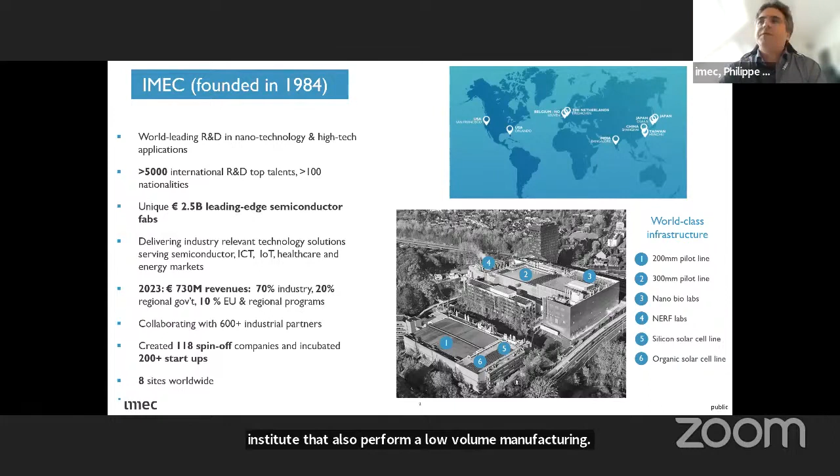Okay, so quickly about Imec. We are an R&D institute that also performs low volume manufacturing. Essentially, we cover all the TRL levels that can be possibly made with these nanotech technologies. We have been growing considerably. We are now more than 5,000. Most of our revenues are actually out of industry.

And we have two sites, one on 200 millimeter, one on 300 millimeter, and the 200 millimeter site is more dedicated for the most mature activities, including photonics and optics. But we are also expanding these activities in the 300 millimeter. So the infrastructure that we have on the 200 millimeter is based originally from a CMOS baseline 0.13. The 300 millimeter is more advanced, 65 to 28.

We are, of course, well known to other people for the most advanced CMOS scaling, but I didn't put it on this slide. We are operated 24/7, and we have all kinds of integrated photonics and flat optics type of technology together with the ability to manipulate different kinds of substrates such as glass substrates.

So when we look at our different platforms, we essentially have pixels. So this is the active part. We're doing photonics, nano optics. We're also covering MEMS, 3D, and so on. And today, I will talk to you about meta-optics, multispectral, silicon photonics, silicon nitride photonics. We do have as well some activity on nanoimprint lithography that is somehow related there, but I didn't have the time to cover that today.

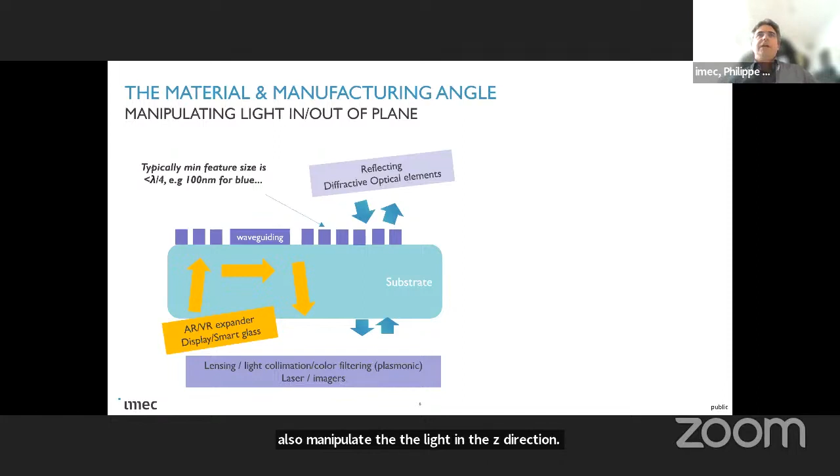And there are for us critical aspects in terms of coatings and thin films. First is the feature size. Obviously, when you want to manipulate the light towards the lowest wavelengths, then things tend to be very small, specifically for meta-optics. The refractive index, in order to have a good core, the transparency is important.

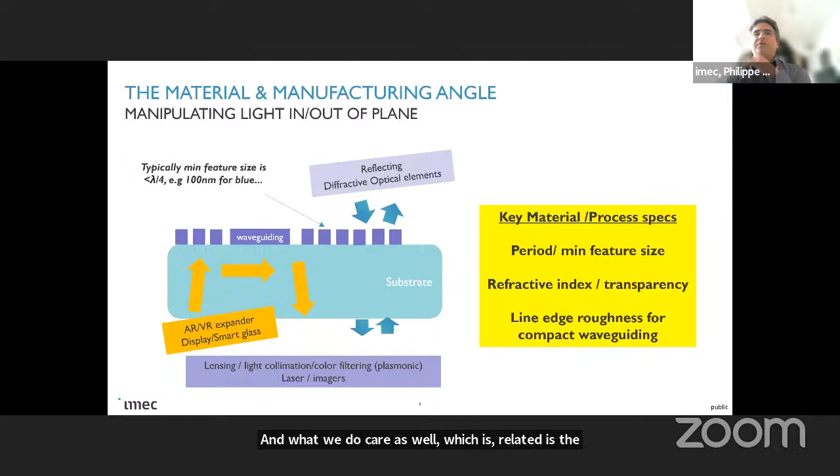So at which point do you decide that you have a waveguide or not? It's actually a perpetual debate in the organization, believe me. But essentially, that's what it's coming down to, the transparency. And what we care about as well, which is somehow related, is the line edge roughness or eventually the surface roughness of the coating that we are using.

So when we talk about integrated photonics, the most popular technology that we have is our integrated silicon photonics platform. It's based on crystalline SOI silicon. We do have as well LPCVD silicon nitride waveguides that can be integrated together with the platform.

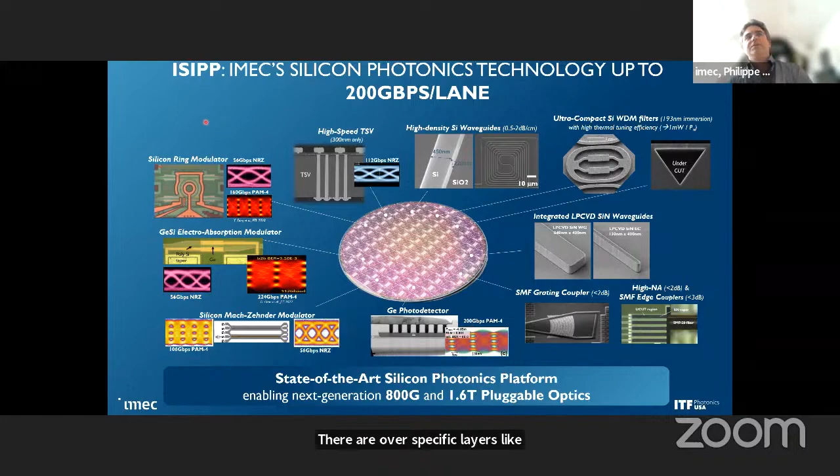The platform is very complete, actually has been developed in our facilities, and has been transferred to a production site where our PDK is running. And these are the people at the end that care the most about the control on thicknesses and on refractive index in the organization. There are other specific layers like germanium and so on that we are growing by epitaxy, which also need some careful processing.

This is this first platform where you can see we are stacking the SOI, we are putting the silicon nitride, and then we have back-end of line type of processes that we are running. We also have a low-loss silicon nitride, and that one is the high-temperature nitride, which goes into the dB per meter range usually. So for some applications, specifically in quantum, they are really chasing the photons. And we do use this platform for this kind of application where the losses are extremely important.

For meta-optics, for those who are not familiar, the light propagates in the Z direction through the surfaces, and you are able to achieve different kinds of functions. So lenses is a very classical one, so flat lenses in that case, but you can also do color filtering, you can do beam shaping, you can also use it for doing some kind of beam steering, shaping, display expander, and some people can also use it as a reflector. So the platform is very versatile.

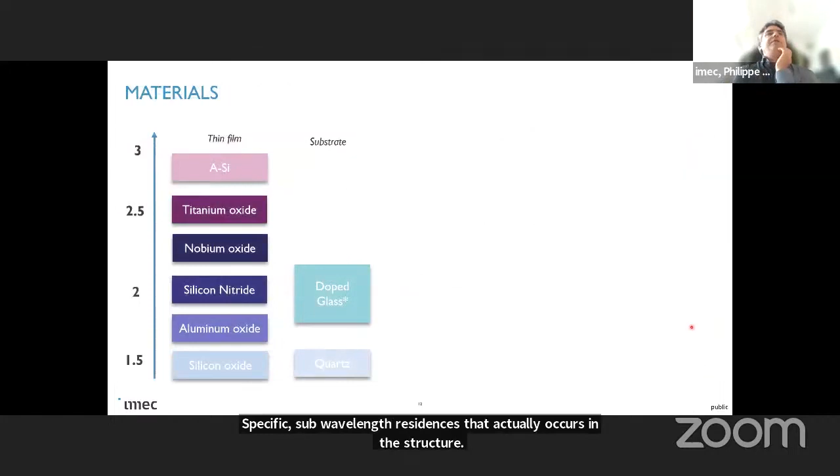And it relies on this specific sub-wavelength resonances that actually occur in the structure. We are using different kinds of materials for that, starting from the low index, silicon oxide and quartz for the substrate. And then there is a lot of work going on doped glass, when you're actually using the core of the glass also as a waveguide. So that is very popular in AR/VR.

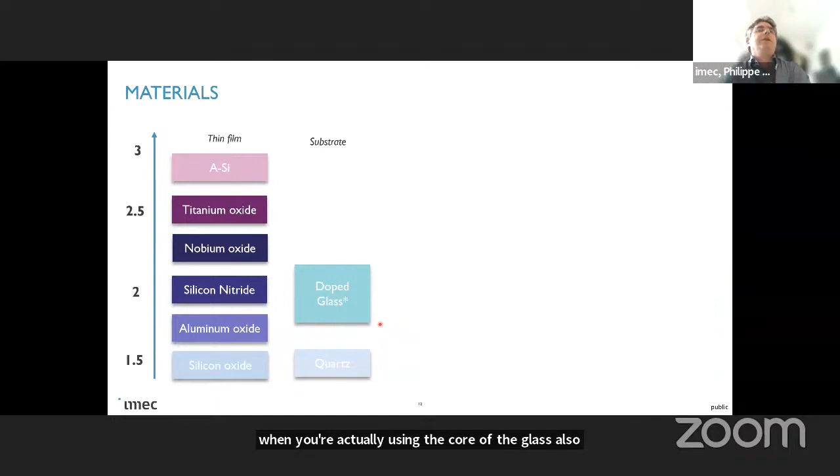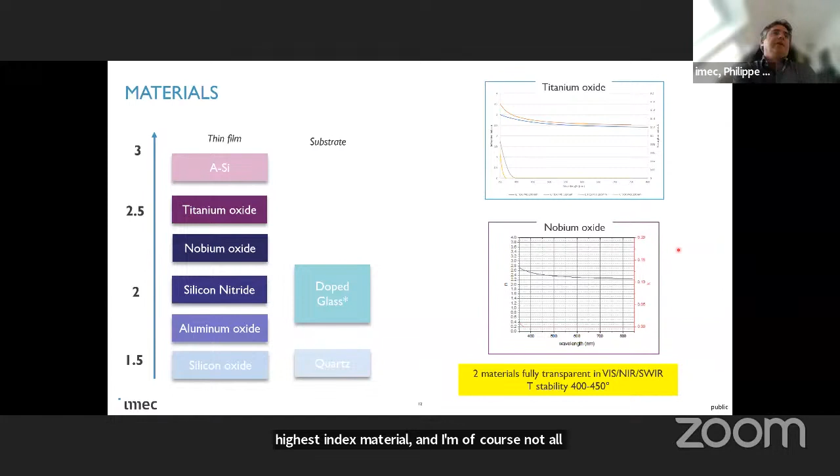But we are also looking into the highest index materials, niobium oxide, titanium oxide, and even amorphous silicon. They are, of course, not all transparent in all the wavelengths, but that is what you need to do, for instance, when you are operating in SWIR or above 900. We use the silicon because it has the highest index. Otherwise, we start to use a material like titanium oxide and niobium oxide.

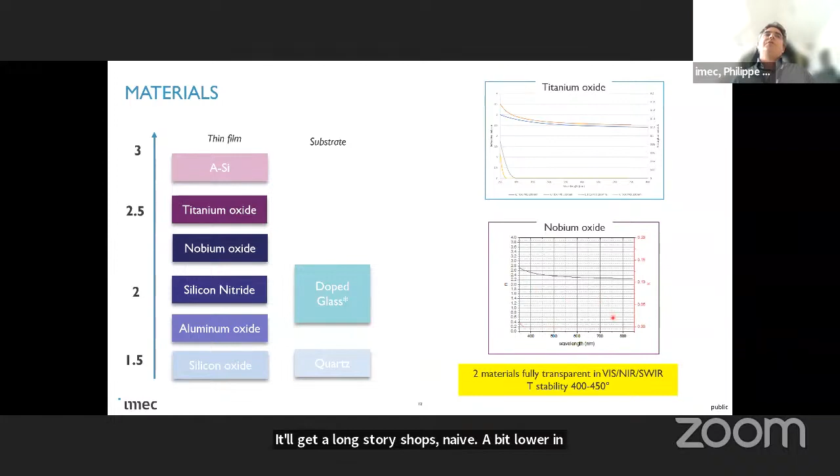They are slightly different. There is perpetually a lot of debate in Imec on why we should use one and not the other one. And to cut a long story short, niobium oxide might be a bit lower in index, but actually is much more stable when it comes to temperature. And titanium oxide can still buy you some performance if it's processed in the right manner.

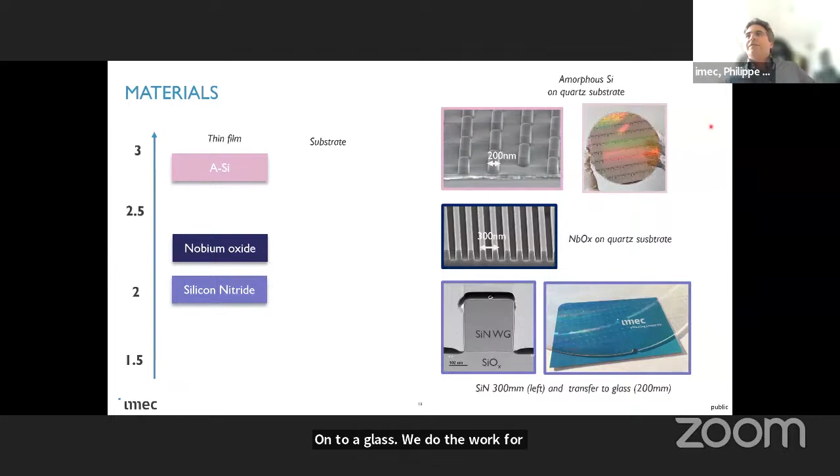We have been processing these different kinds of structures. So with the silicon nitride on glass substrates. So these are structures that are either directly processed on the glass or that are actually layer transferred onto a glass. We do the work for niobium oxide and amorphous silicon. Here you can see some examples of 200 millimeter wafers that have this flat optics type of structure.

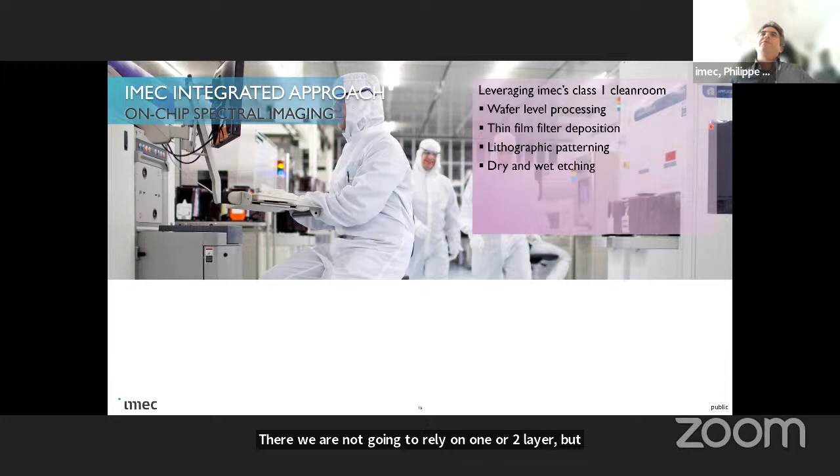Another important item today: we are post-processing imager wafers with Fabry-Pérot type of structures, so thin film interferometers. There, we are not going to rely on one or two layers, but clearly on a stack of very different layers where the uniformity, actually the optical path, is extremely important. This is something that we do in the organization.

So each of these small blocks that you see there, you can see all the layer stack, we are directly on the pixel processing a stack of thin films. The deposition is very important. We are working with Bühler actually on the topic.

I see they are later in the call. I think they'll be happy that they are cited here.

But we do as well have, depending on the wafer size, other kinds of equipment that we use. This is helping us to provide different kinds of structures. So we have line scan, we have classical imaging with Bayer-like patterns. Depending on the wavelengths that you want to sort, we apply some different kinds of processes.

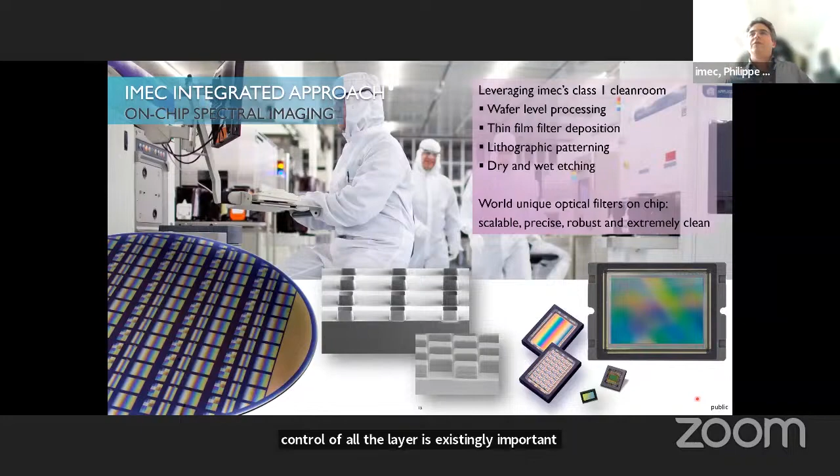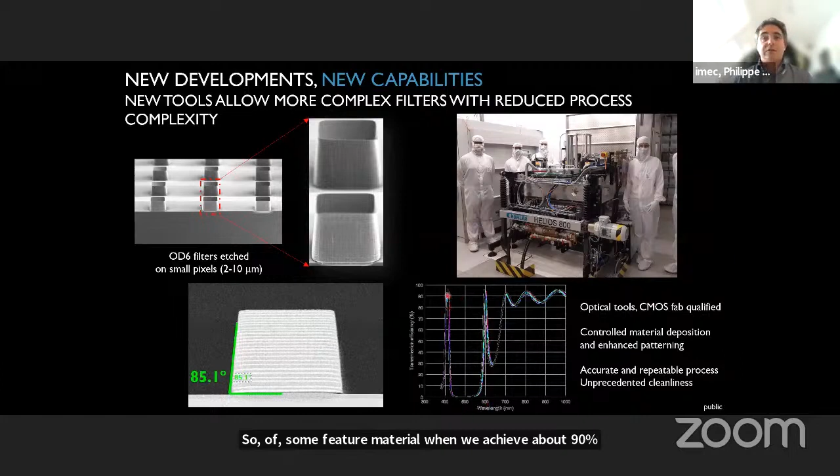And the control on all the layer thicknesses is extremely important because the direct physical thickness is going to determine the wavelengths that you're going to filter. So here, a classical example of some filter material where we achieve about 90% of transparency at 400 something nanometers. You can see this is a typical layer stack that is being used.

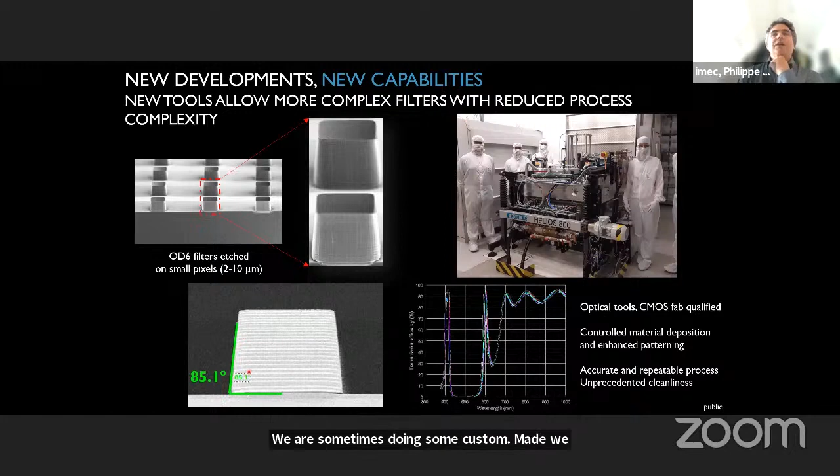So the layers are not always uniform. We are sometimes doing some custom made thicknesses. We can etch quite straight. So the etching, I know we are not in an etching meeting, but actually once you have the good layer control, etching this material is also extremely important. And so far, this is what we can achieve.

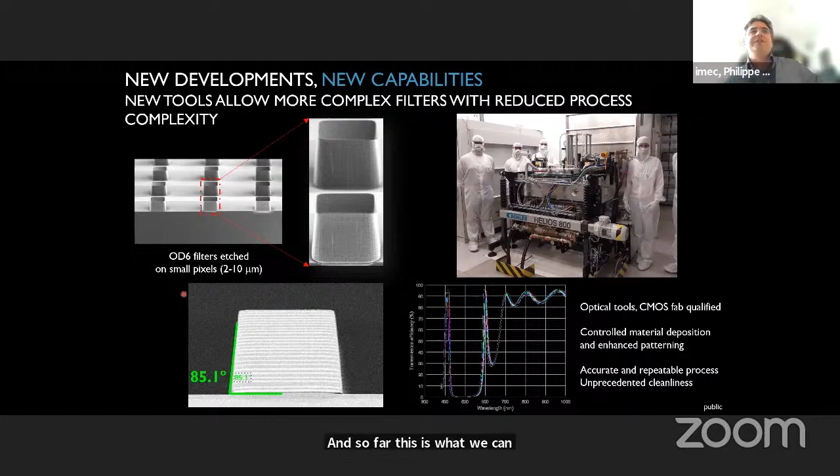In general, etching very dissimilar materials, classically in semiconductor manufacturing, is a challenge. So we are also welcoming input from the etch vendors as well.

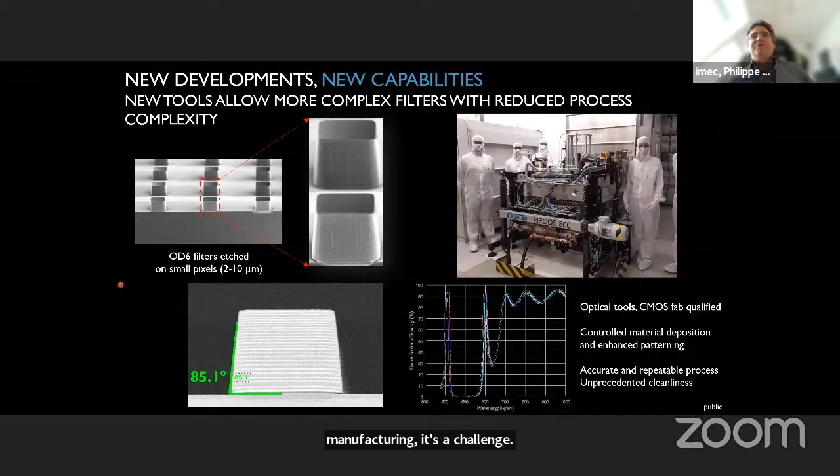As a conclusion, I've been running a bit fast, but I'll leave a bit of time for questions. The first thing that comes to our mind for coatings is tight thickness and RI control. By tight thickness, I mean usually less than 1%. This is really important. And actually, classical tools used in semiconductor manufacturing are a bit looser.

They are also producing layers that sometimes are a bit more rough. So that's really a point where we are thinking for major improvement. When you go towards the edge of the wafer, usually this is where the machine vendors have not always been designing that so carefully. But rest assured that the etching guys have also been giving away the last centimeter of the wafer usually. At least on 200 millimeter for the older generation tools; on 300 things are a bit better.

And which is also very important for us is the refractive index control. Some people don't always mention that, but having a very uniform control is nice for the thickness, but actually what matters is the refractive index, and there we are into 0.00x, even better than that.

That is extremely important. So for instance, when you're forming thin films and there is slightly different microstructure, a bit more of crystalline phase or a bit more of an orientation, we will be quote unquote seeing that in the performance of the devices. And that is something we are watching very carefully.

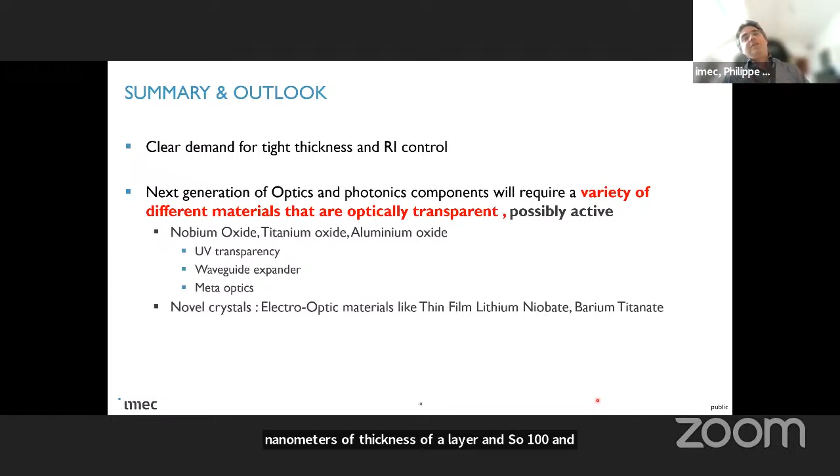And then you have the next step, which is to put oxide, the lowest index material. You need to be able to do gap fill. And that oxide, it's not very often cited, but sometimes induces optical losses as well, because the people that work on these depositions add a bit of their ingredients, the precursors and so on that are typically used in CVD processes, and they also induce losses. Niobium oxide, titanium oxide, very important for us for the upcoming platform.

We have demonstrated niobium oxide as a waveguide as well. The losses are not yet at the level of what we can reach with silicon nitride, but are today maybe in the range of what you can do with crystalline silicon. We are also seeing regions of the spectrum that become more and more interesting. So aluminum oxide for UV transparency is very important. And we see these three kinds of material really coming up.

So for all the people that are working on coatings and characterization of these coatings, this is definitely an area of interest for us. Now maybe it is a bit out of scope, I don't know, but I just want to mention that, as I mentioned, only silicon is active. So when you apply a bias to it, it can do things that the other materials usually cannot.

So we are looking to new kinds of electro-optic material like thin film lithium niobate, barium titanate. These are more crystals. We actually need to have a crystal to produce the electro-optic effect. These will also require very tight control. The thin film lithium niobate, normally it's an ingot that you slice and eventually bond onto something else. The barium titanate is today an MBE process. So it's very expensive, but it produces tremendous performance. I think there's plenty of work to be done for this audience as well for this material.